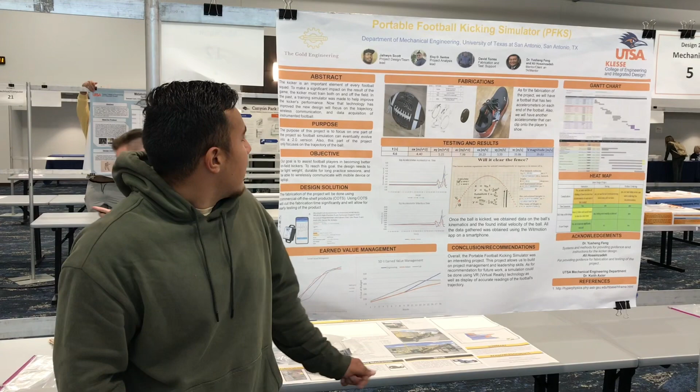The abstract for our project is that the kicker is an important part of every football squad. To make a significant impact in the game, the kicker has to have an accurate kick both inside and outside the field because they can range in between those two areas.

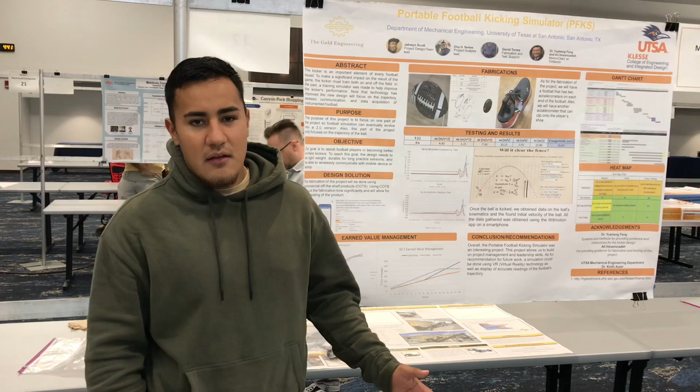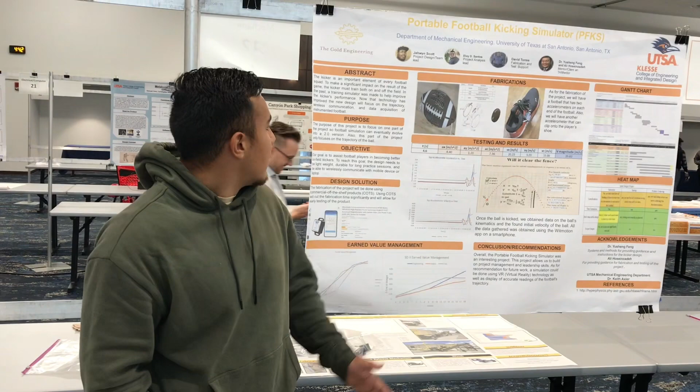In the past, a training simulator has been created, but with current improvements in technology, we want to improve the accuracy of each kick and the trajectory motion. We'll be focused on the trajectory, the wireless communication, and the data acquisition of the instrumented football.

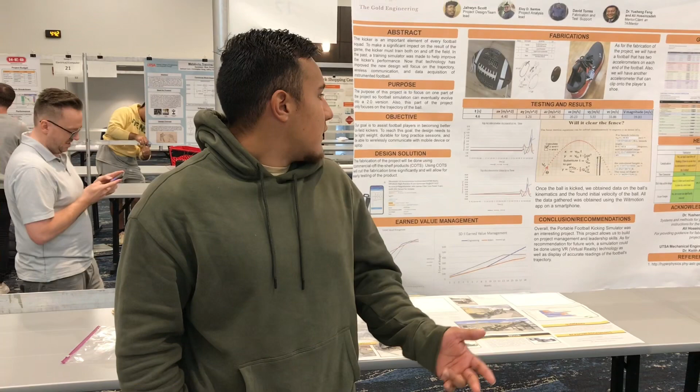The purpose of our project is that there will eventually be a second part, a 2.0, which will focus more on the simulation part. For this part of the project, we are only focusing on the trajectory of the ball so far.

The objective of our project is to help kickers become better, have a better understanding of how they're kicking, and to have an accurate measurement of the velocity, acceleration, and trajectory of the ball. Now our project design and team lead will explain the design solution, the team fabrication, the testing, and results.

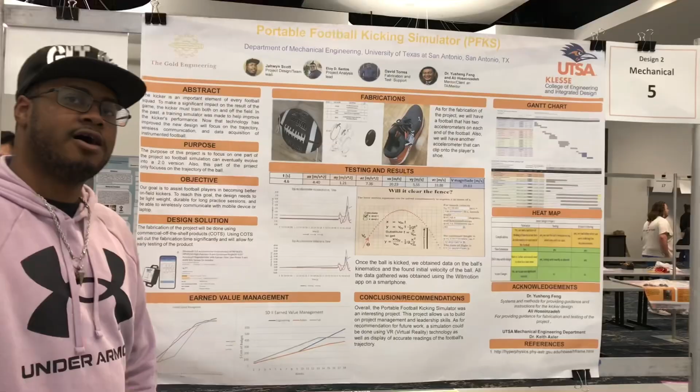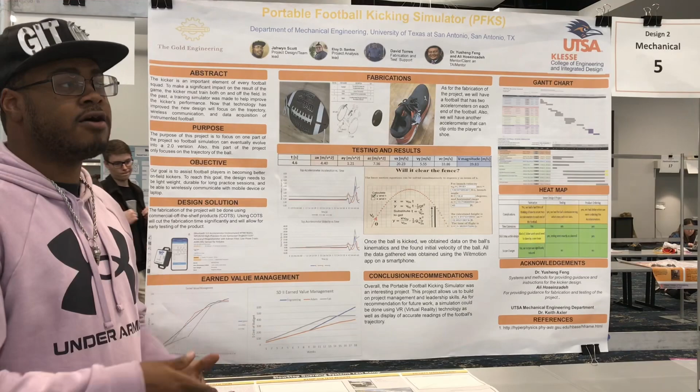Hi everyone, my name is Jahwyn Scott and I'm the project design team lead. For our design solutions, we decided to base our design on commercial off-the-shelf products, which we call COTS. With COTS, we can significantly reduce our fabrication time and also start our testing early so we can finish on time for our scope.

As for our fabrication, here's the picture of our instrumented football. Here are the two cables. These allow us to charge our football with the two accelerometers that are attached inside.

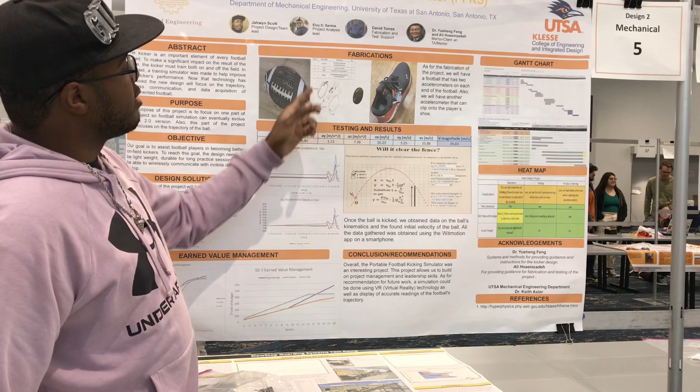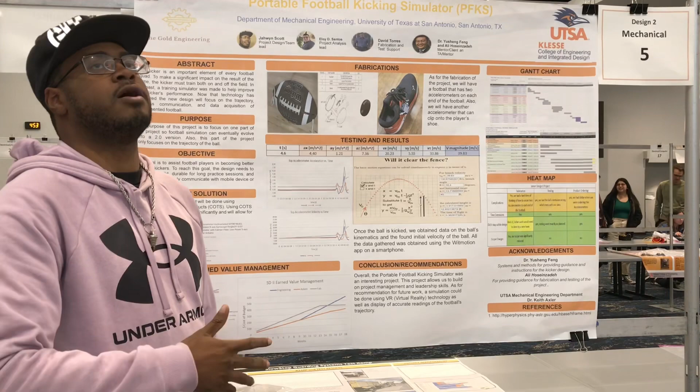As for our design, we had to open up the football and place the accelerometers inside and glue them, attach them. The glue we decided to use was a polyurethane adhesive like Gorilla Glue, which you can find at any convenience store like Walmart or even Home Depot.

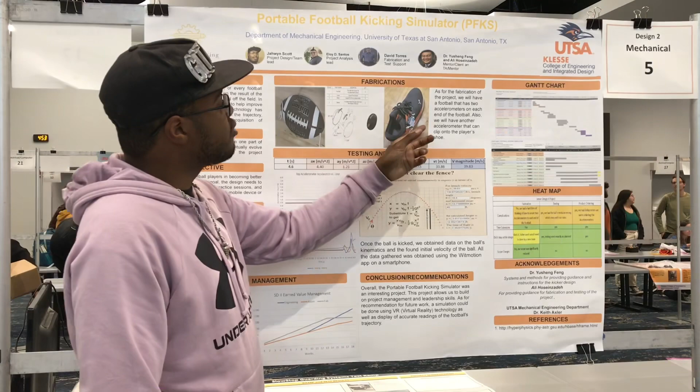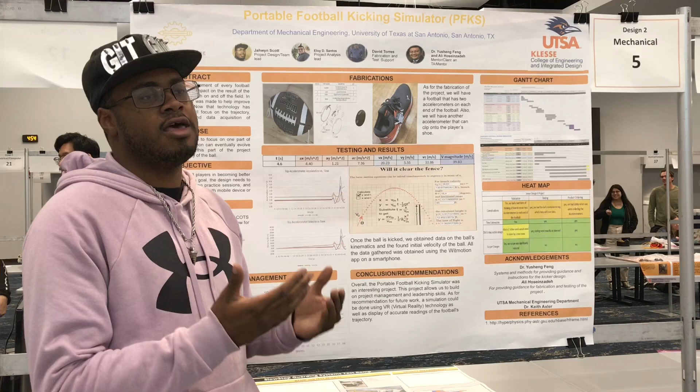As for our shoe, we had to simply attach the accelerometer to the side of the shoe so we can get an accurate read of how fast and how much acceleration the accelerometer is actually giving out.

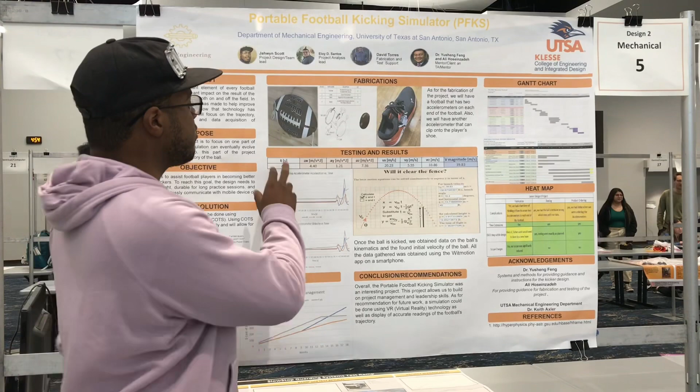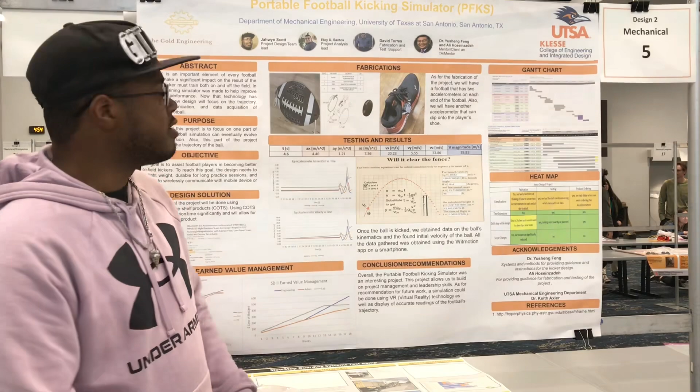As for our testing results, here we have the time and our acceleration. Each of these two accelerometers can read out our acceleration in the X, Y, and Z components. Here we decided to focus more on the center of mass of our football, so we have our center of mass for the X, Y, Z components, and then center of mass velocity in the X, Y, Z components.

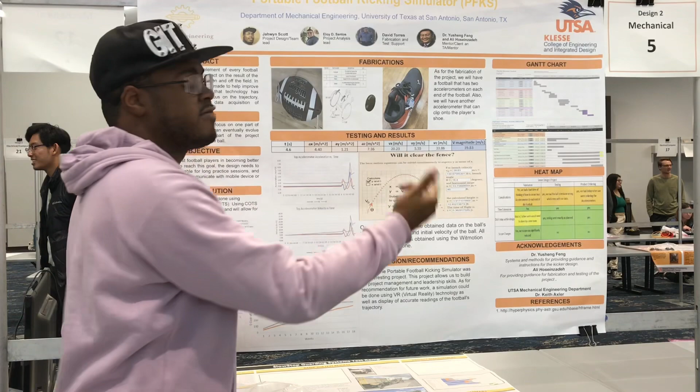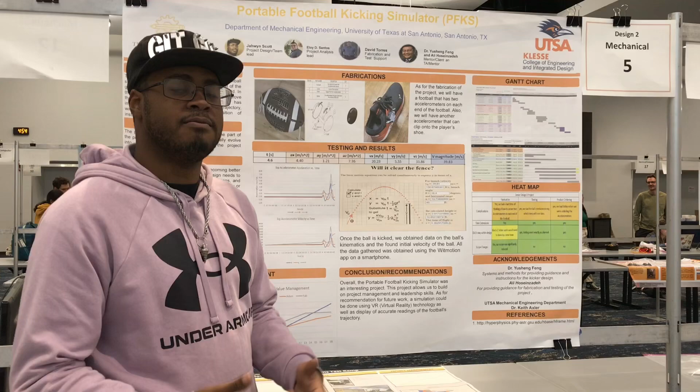We'll eventually take that magnitude and be able to find if it can clear a fence of 11 feet or so. Our fence will technically be a football field goal, because by the pole it's around 11 feet tall.

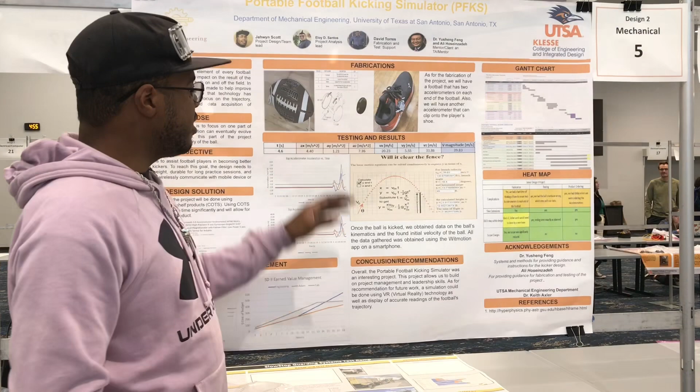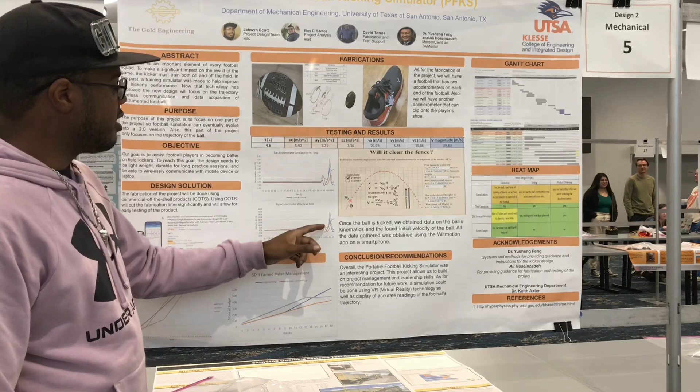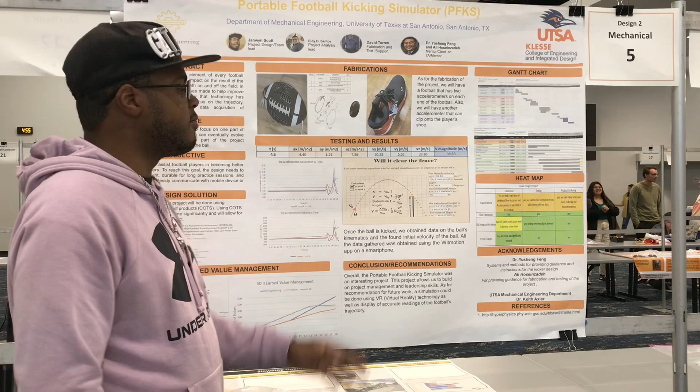Here are the graphs, this is where the spike tends to be. In gray, this is our Z acceleration graph, here in our top accelerometer. This graph indicates what kind of magnitude spike we had. This powerful spike here indicates where our initial velocity actually began.

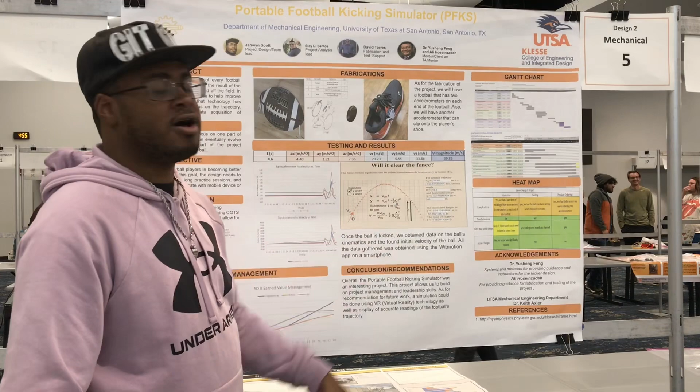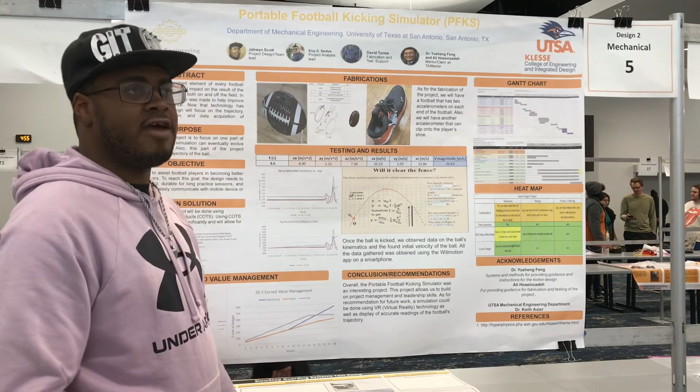So if we had a velocity magnitude of 39.83 meters per second, we would be able to get up to 12.8 feet in the air, and so on. Now that I've concluded, my friend Eloy Santos will explain the Gantt chart and the project management for this project.

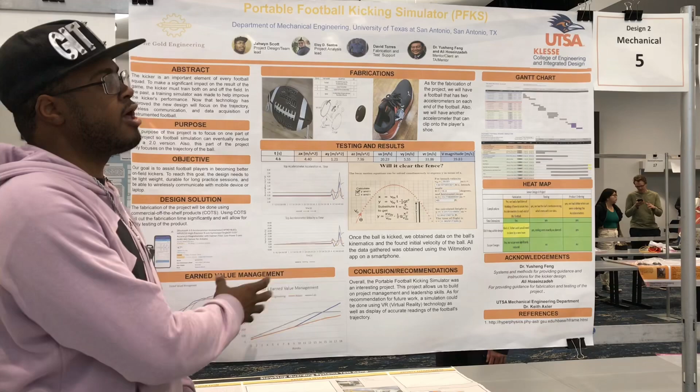I would like to begin talking about our portable football kicking simulator. Let's take a look at our earned value management chart.

During Senior Design 1, our initial budget was set at $1,000. This amount would cover the engineering analysis, administration, and fabrication required for our project.

This graph reflects a timeline of data beginning in January through May. In February and March, we met with our mentor, Dr. Feng, and worked on engineering analysis and design development. In April and May we submitted our project proposal.

In Senior Design 2, we had to make some modifications to our scope because our mentor, Dr. Feng, could no longer be involved in our project. This required us to change our scope and focus on an instrumented ball instead of the force array wall, which was Dr. Feng's original plan.

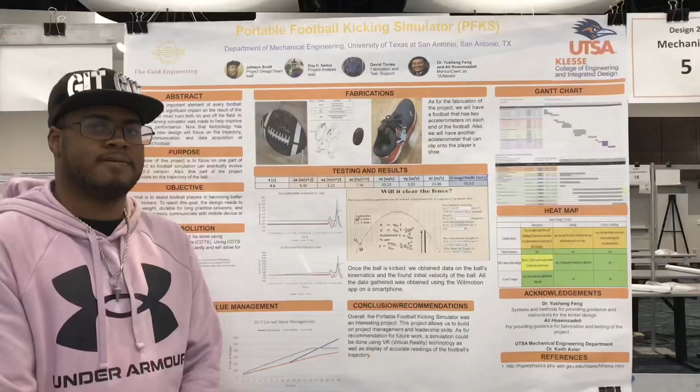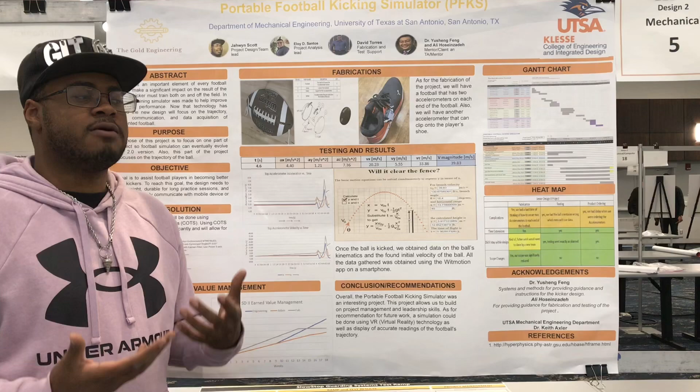As for our conclusion and recommendations, overall for this senior design project it was actually pretty interesting. So far we managed to go over topics that we can further improve upon, and it also allowed us to develop more skills for our career fields.

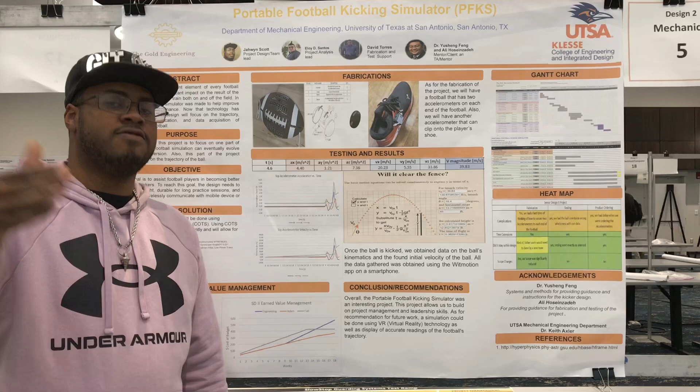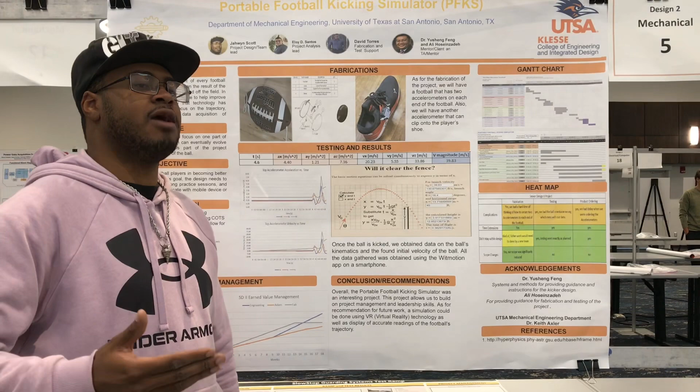This is only phase 1 of our project. For phase 2, another team will come in and improve upon the project to evolve it into the 2.0 version. To do this, they will incorporate VR technology to not only simulate the football experience, but also to have enhanced diagnostics, allowing the player to figure out what they need to do for their next kick and to improve themselves when they go out for that next field goal.